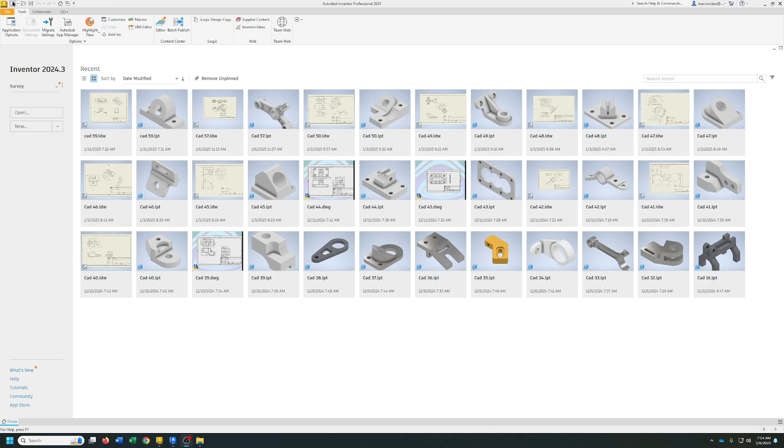All right, we're back. We're doing CAD 62, the intake flange. This one looks difficult, but it's not really. You just do one of them and then copy it the other few times. And it's going to be standard dimensions.

If you look in the book, it's got all the dimensions on the first piece up there, that front piece. So we're going to do that first. We'll go ahead and start our sketch, and we'll just do it on the front. We're going to put that big hole, that 1.5 one, right in the center.

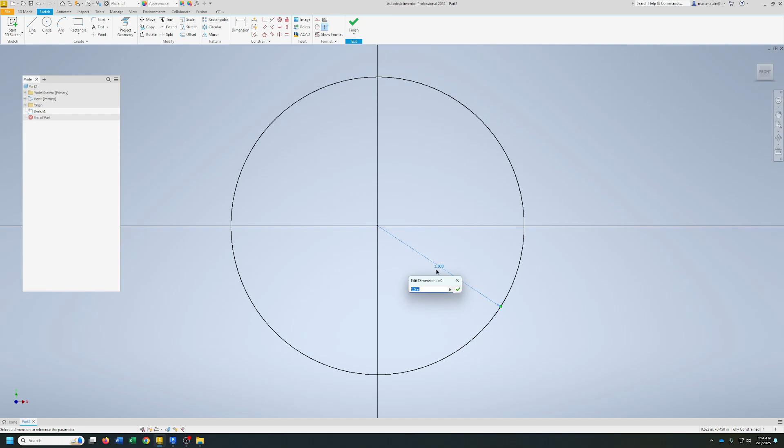That's supposed to be a diameter. So, there we go, 1.5 diameter. Now we got another circle out here. And it's going to be a diameter of 0.375.

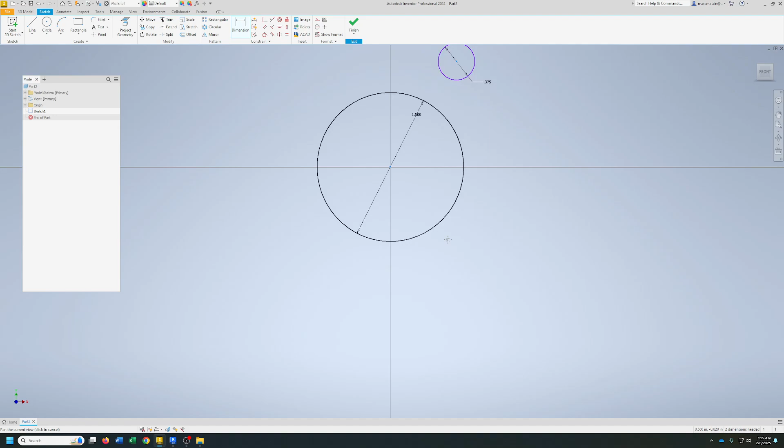And that's going to be 1.25 over here, so that's what that's going to be. And there's going to be a line here. That's going to be 1.5.

Now we need to get the height on this, but before we do that, we need to get our base. So our base is going to be this line right here. From the center of the circle to the base, it's going to be 1.5.

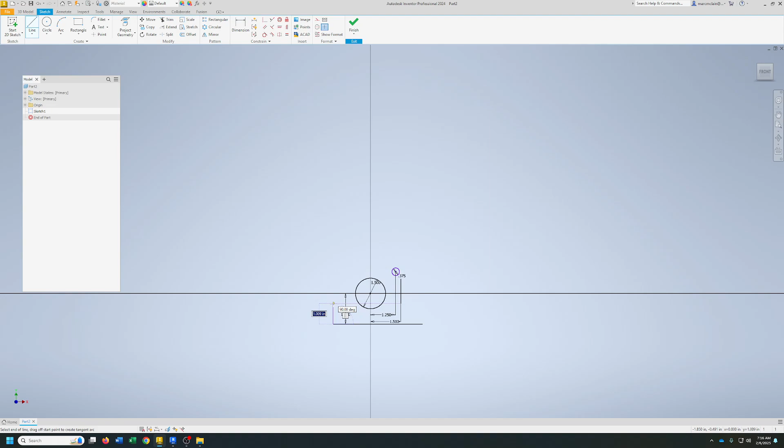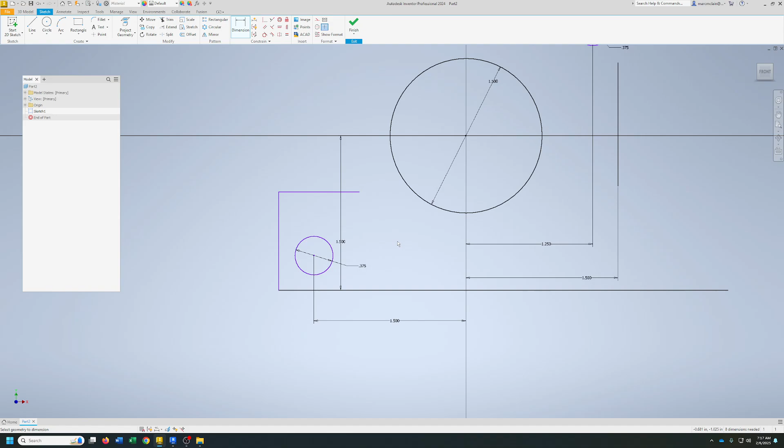All right, now we'll have a circle over here, it's also 0.375. And that's going to be 1.5. And from here to here will be 1. This will be 1. This is 0.5.

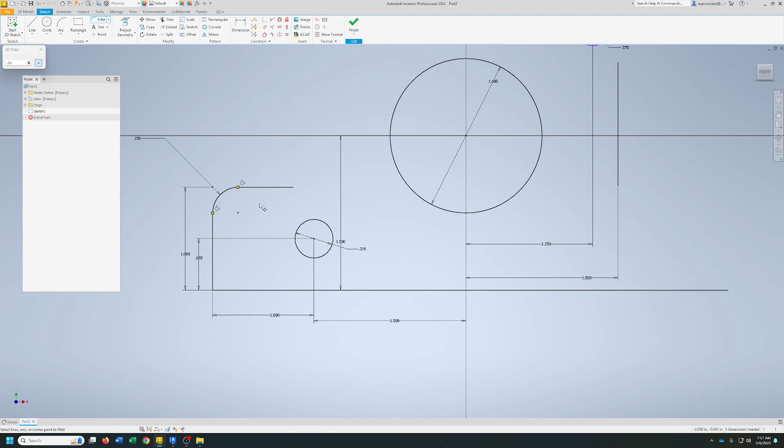Get a little radius fillet here, 0.25. And we got a radius 1.25 on this same point. So circle, pick radius 1.25.

And it didn't get radius for me, no big deal. Dimension type, radius, there we go, 1.25. And we got another fillet, this one's 0.5.

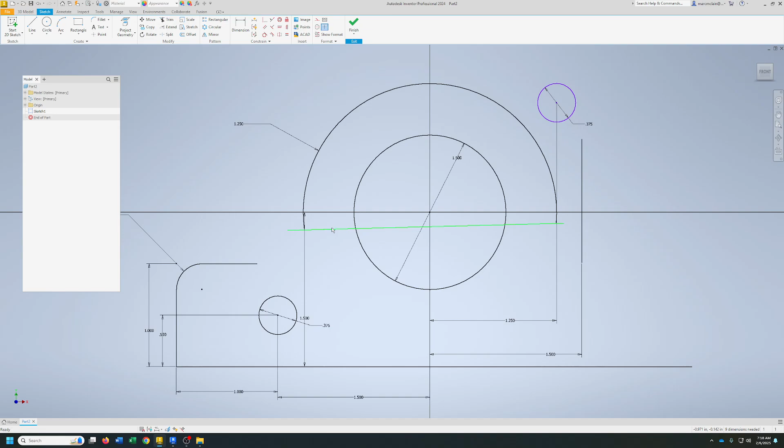Doesn't want to pick that. Here, let's do this, let's trim this thing out a little bit. There we go, more than one way to skin a cat, right? All right, now, from bottom line to the center of this is 2.5.

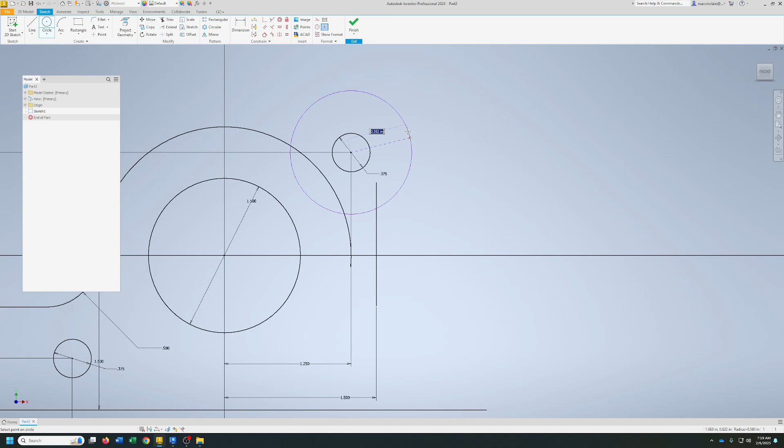Radius on this, and then we have a line, tangent. Pick line, pick what you want it to be tangent to on both ends. And there we go, now we can trim that.

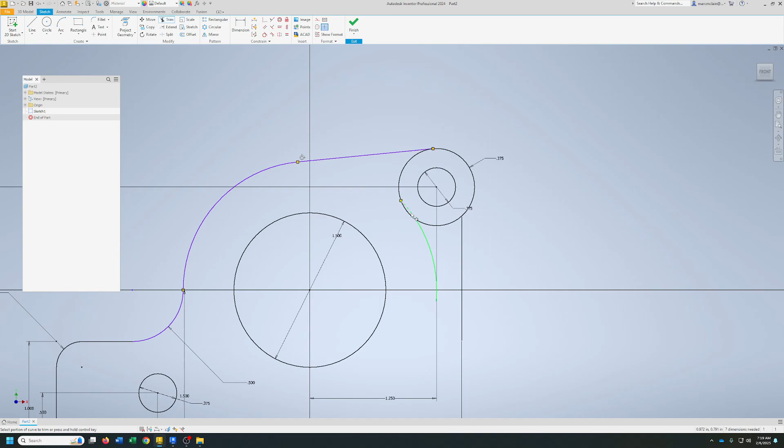All right, and we got a 0.5 radius right there, so fillet, see if it'll let me do it. Nope, it wants that trimmed. Okay.

Still set to 0.5, we'll get that. All right, that's got that. So there's our first one, all except for this one. So I've got to go.

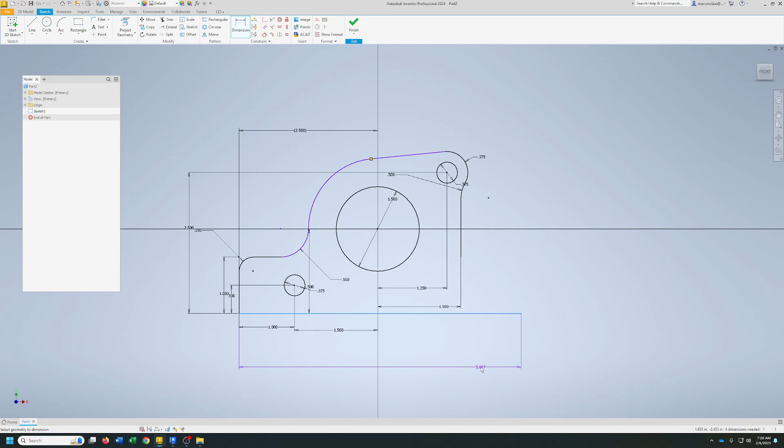Let's go ahead and put this dimension in here. We'll accept that just to make sure we got that right. Now I'm going to grab the whole thing. Actually, before I do that, let's get this. There we go, now I'll grab all this. And we're going to be doing some erasing.

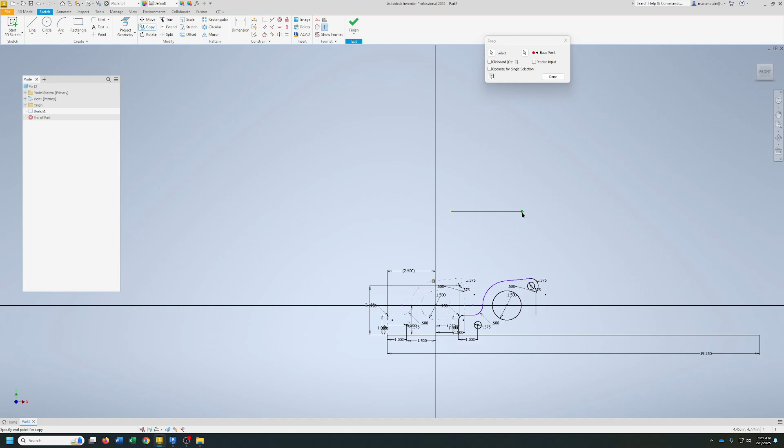That's okay, so we can copy that. Base point anywhere, it doesn't matter. And we're just going to come make sure it's vertical -- or, excuse me, not vertical, horizontal. 4.5.

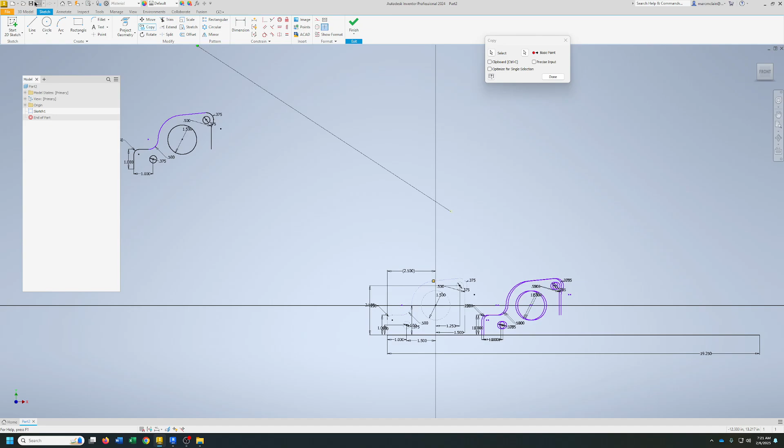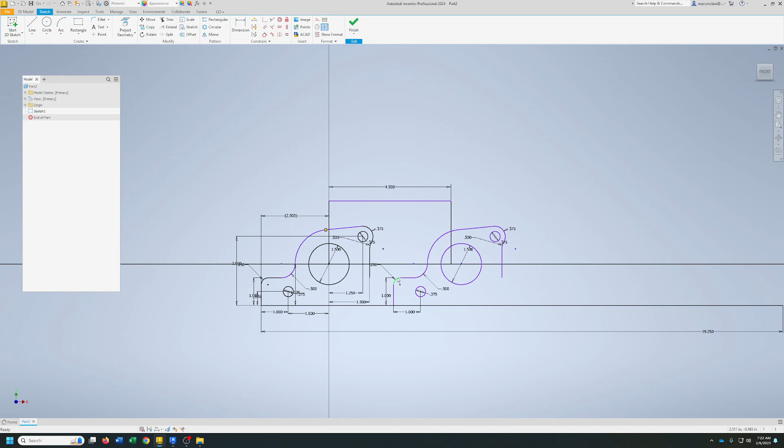Just one, okay, now. I want to move that whole thing, so I'm going to do that. We'll just trim here, that'll give me a point to trim to, or to move to. Take that out, take that out, take that dot out.

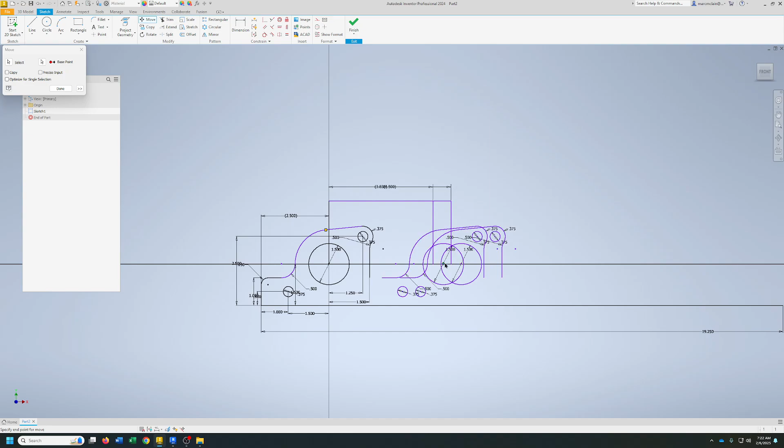There we go. Now, move base point from there, say yes, and then go to there. All right, now it's got that in place. I'm going to say done.

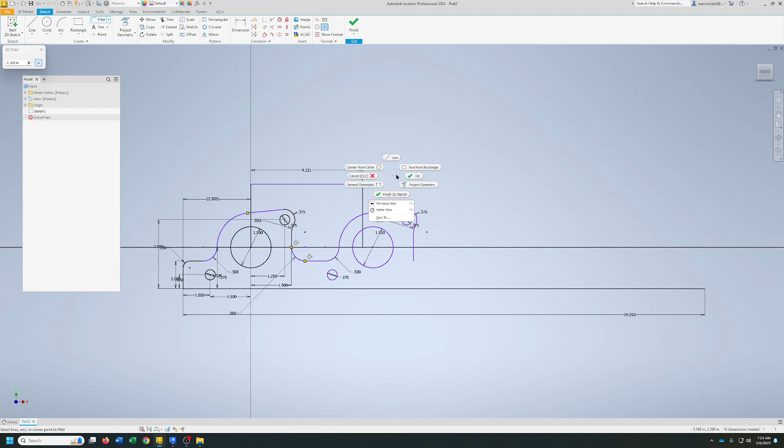Now we'll do that other fillet, still set to 0.5. And there we go. I can erase this and this. All right, now I'll just grab these.

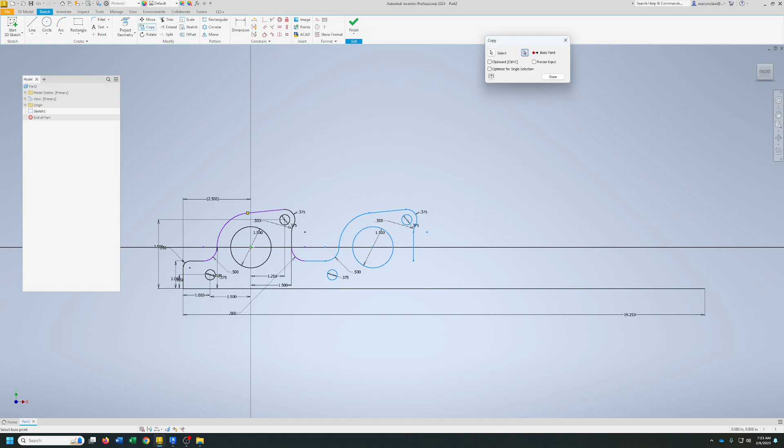And that, copy, base point. Pick that as my base point. And then one more time. And done, and I'll just do my two fillets.

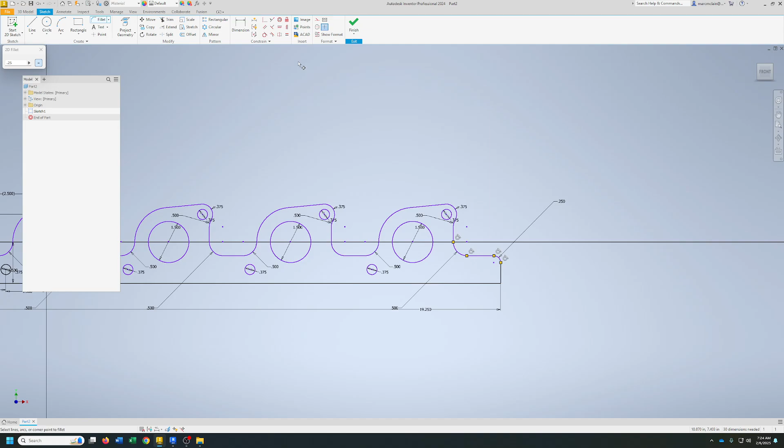All right, and line it. Do that fillet there. And change it to 0.25. And do your fillet here. All right, looks like we got everything in place.

One more circle, we need to copy this one over 4.5 inches. Copy. And then we'll just put our dimension in there.

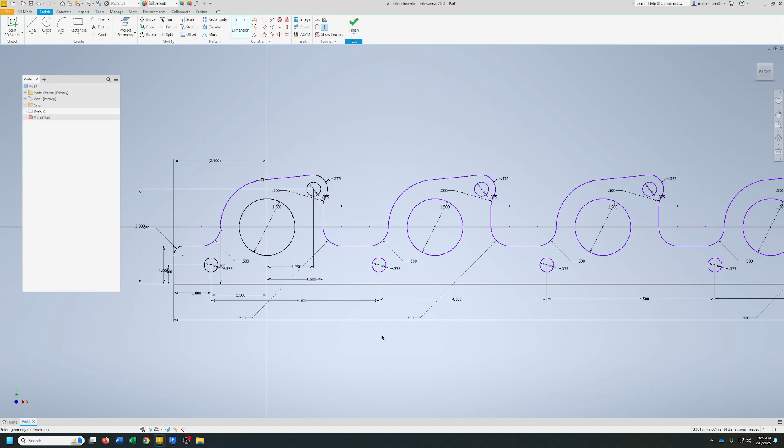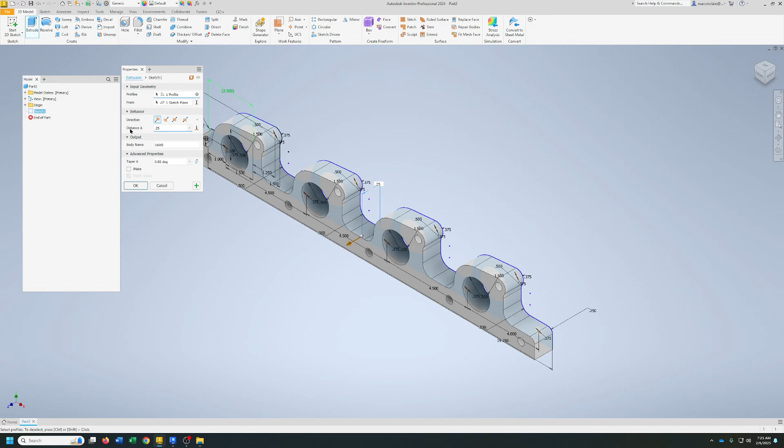And there we go. All right, so we'll finish that sketch. Hit the home button. Extrude, and just grab it. The whole extrusion is 0.25. And there's our flange.

Don't forget to do this part. I've been watching people draw and they're not doing this, so you need to do it. You need to get in the habit. Take flange and then update, and that's your mass and so on and so forth.

You can also rename these sketches or extrusions or whatever, okay? Just got properties, so this would be... okay, flange. Oh, cancel, okay, can't use it twice. We'll call it flange sketch, so that now you know what sketch that's for.

I'll expand on that in the next one. Okay, but anyway, so there's your part. We'll go ahead and save that as CAD 62.

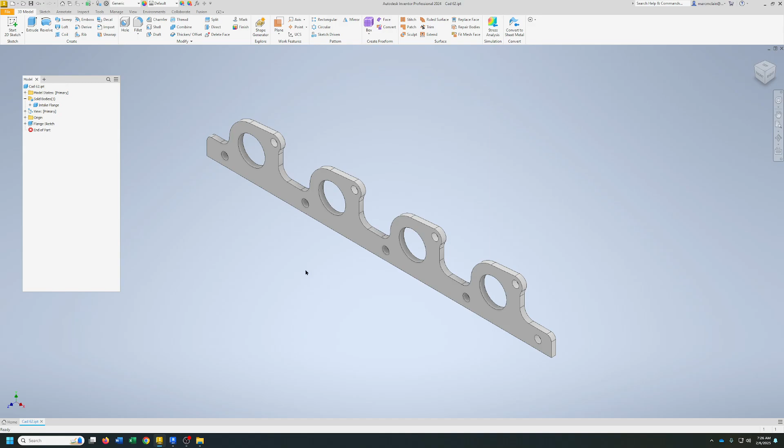Save and then new. Once again, you can use either one of these. I always use that one. You can use the one I use, or you can use the other, it doesn't matter. Let's go with B-size. All right, base.

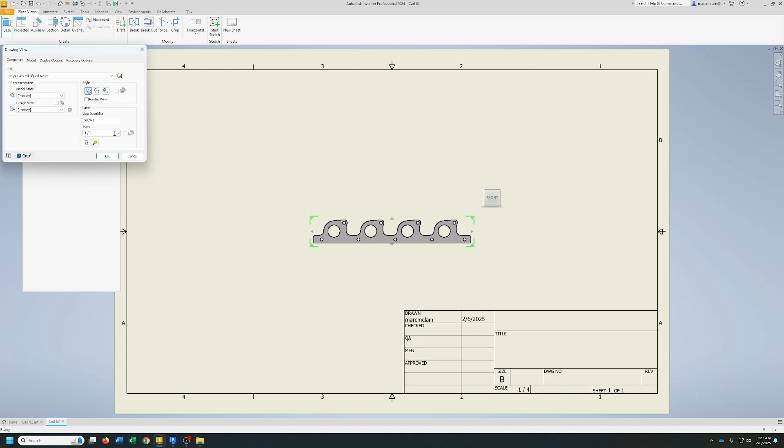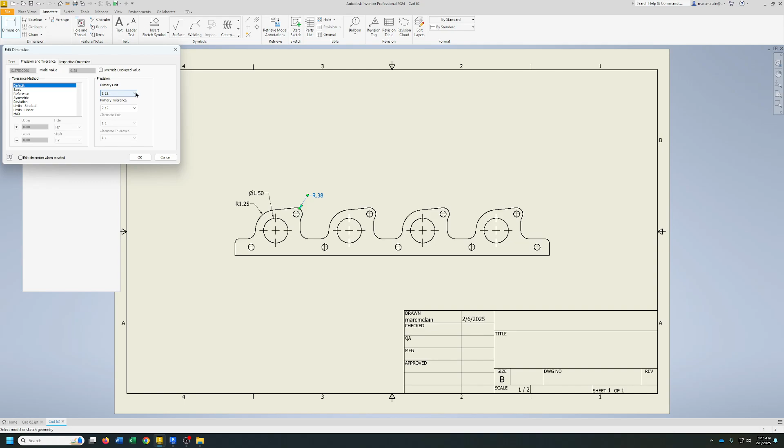And there we go. And then you just dimension it. So we'll annotate, we'll go ahead and put our... as you can see how I'm doing this, just click and change your tolerance to 3.

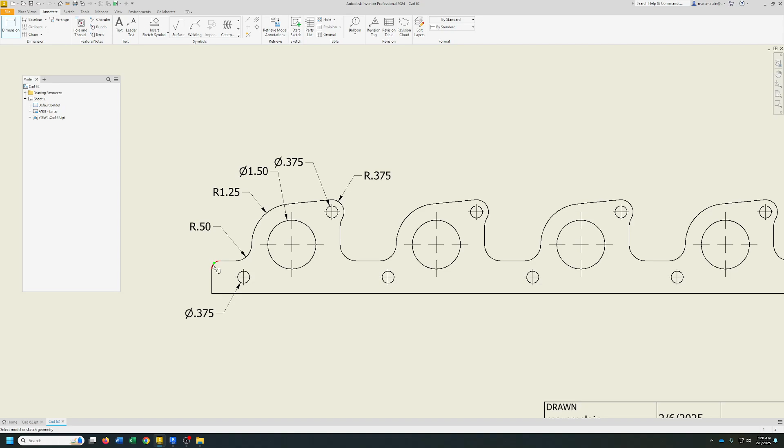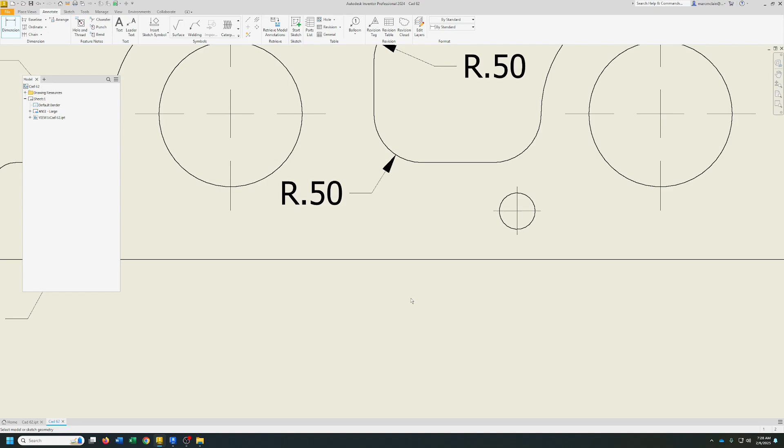Alright, so that's got all the circles, right? Okay, so we need to get this one. We'll zoom in a little bit, because you don't want to. Alright, so that's got all of them. And then we'll get this one.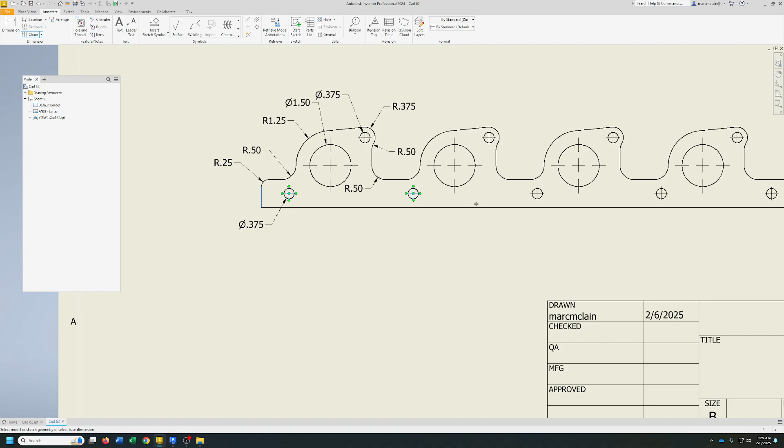All right, so now do a chain. And there's that. I really try not to cross like that, so let's put that over there, and then we'll do this one.

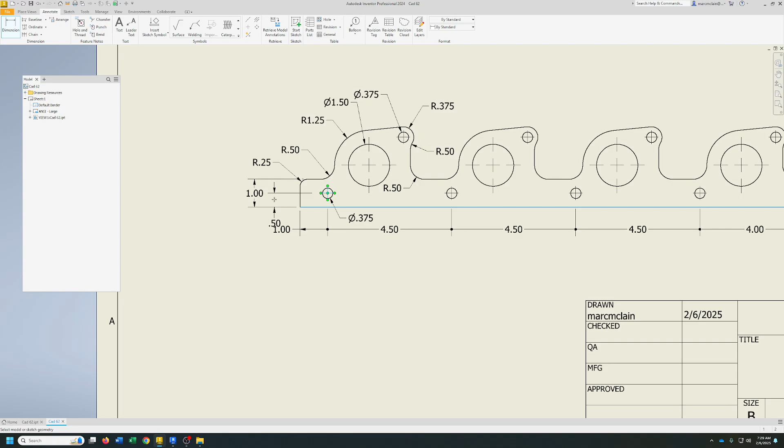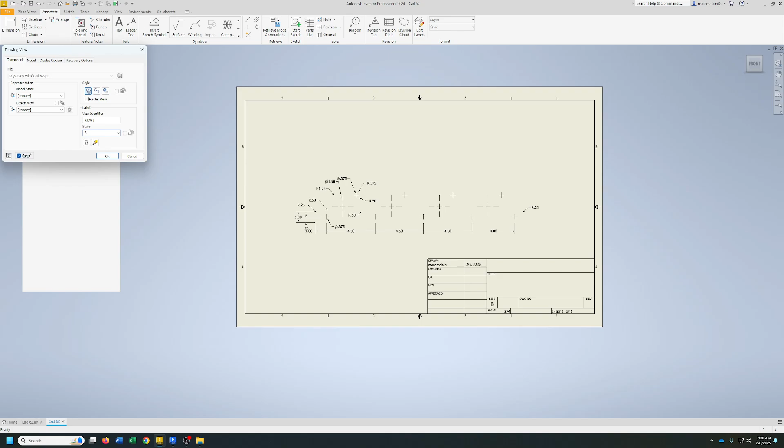All right, so you see what we're starting to run into? We're starting to run into our text being too big. So let's see if we can go a little bigger with our view here. Edit view, let's try 3/4. Now that gives us a little bit more room to play with.

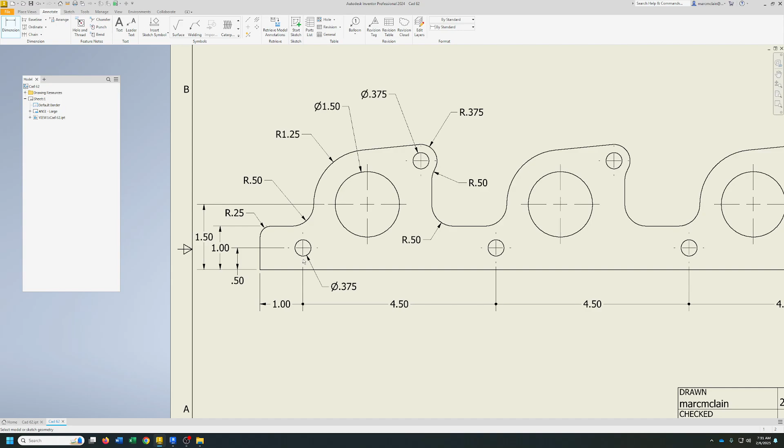Pull that in some, because we want to get this, right? We got one more we need to get in there. All right, so we're gonna have to go to a bigger sheet. That's not a problem, just go sheet, edit sheet, and we'll go up one size to C.

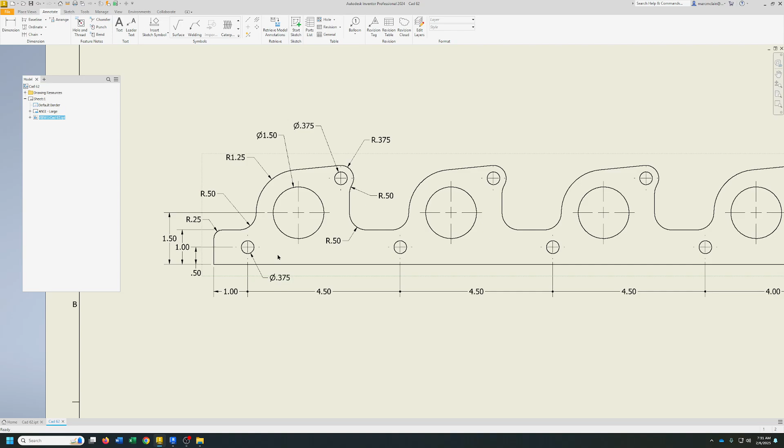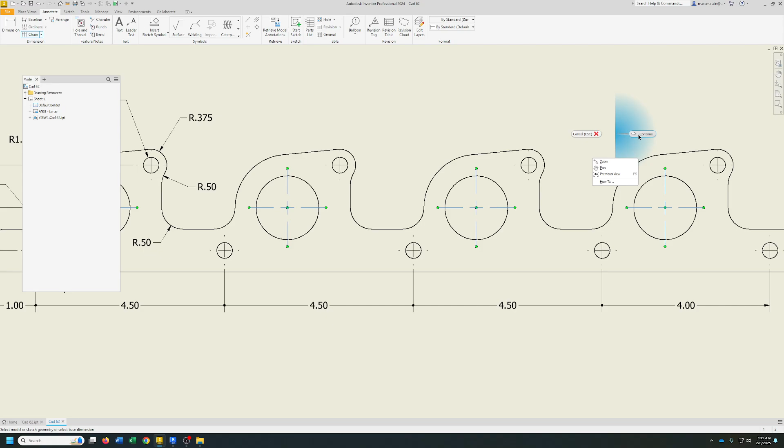And we'll do another chain. Here, here, here, here, and here. Continue, bring it up, and done.

All right, so there's all of our dimensions. Now I'm going to reorder some of these. Put that one back down here, since we've got more room here.

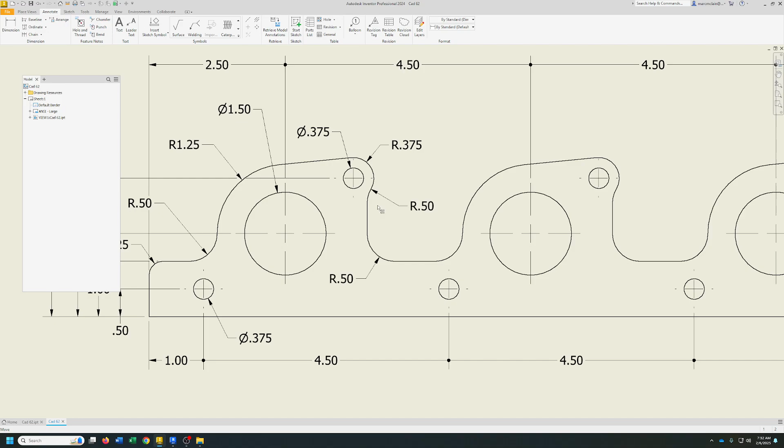Escape on that. There we go. It shouldn't be that difficult, should it? That thing just doesn't want to cooperate, so we'll leave it alone. I'm sure there's somebody else out there that does this more often than I do that can tell you a better way of doing that, but I haven't met that person yet. All right, so let's get our overall, and that should be it.

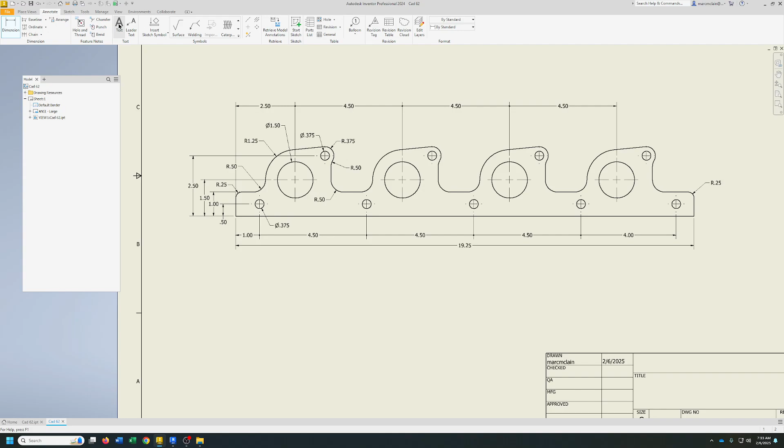All right, so now we got to do our notes. We just do text, pick a point. All right, and we'll type this in. Goodness. .25 inches.

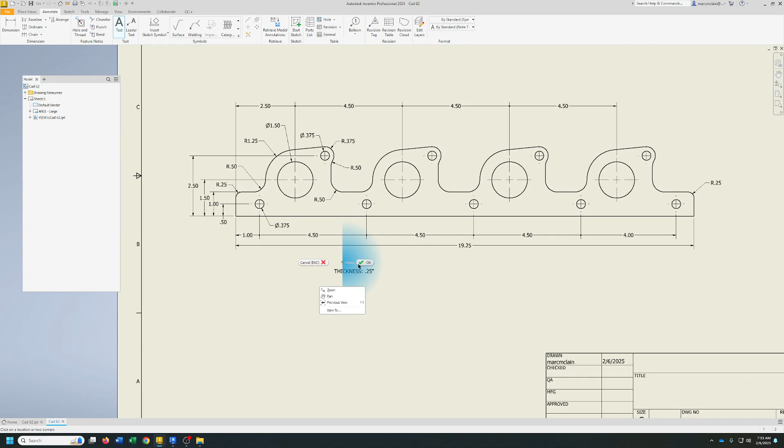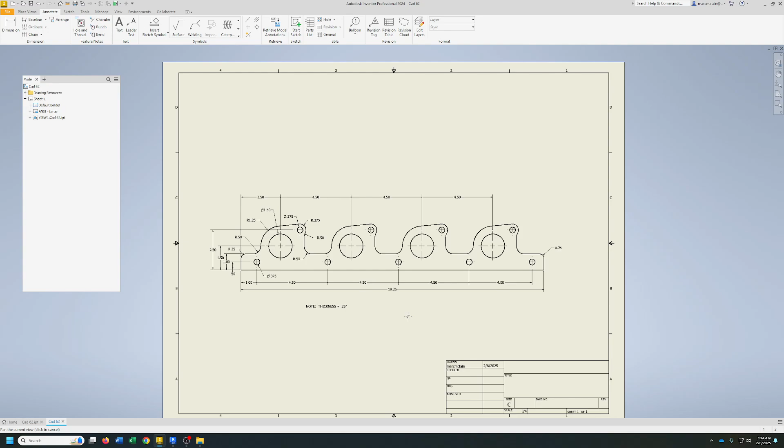Tell you what, let's do that even better. Here, I'm going to edit that. There we go. Yep. There we go. And there you go, that's pretty much got it.

Now let's save this, CAD 62. That gives us our number, of course, your name and the date on there. And that's it for that one. Okay, remember, use a C-size sheet on this one, okay, instead of a B.

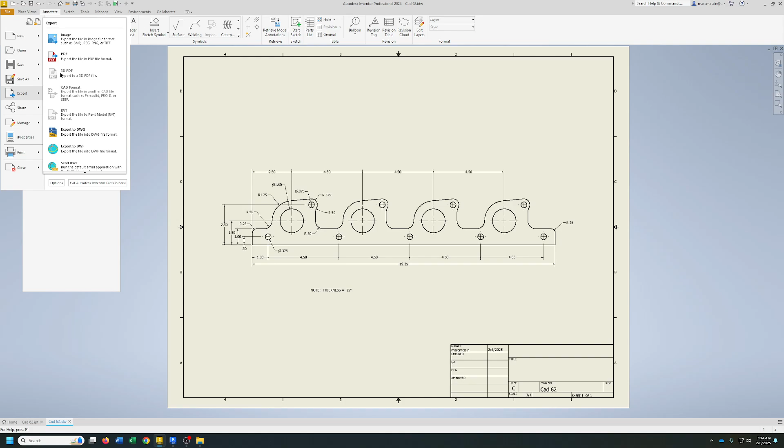And we'll center that a little better. There we go. All right, now save that, file, export, PDF, and of course it'll be CAD 62 PDF. And then we'll turn that in. And I'll see you for CAD 63 next.